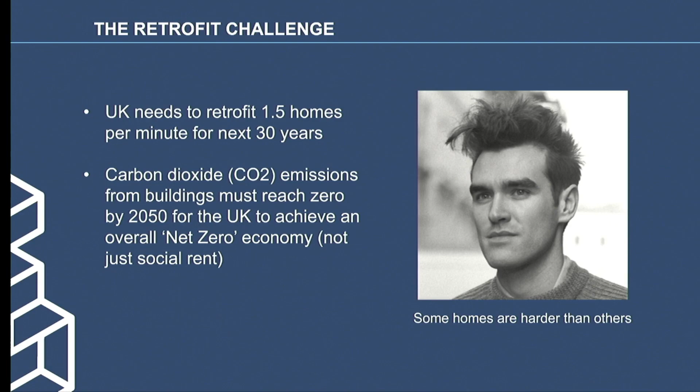So the retrofit challenge - some estimates put it that we need to be retrofitting 1.5 homes per minute for the next 30 years, so I shouldn't really be here. But that's a massive challenge, and clearly when we upscale and start rolling out retrofit at scale with the industry capacity, that becomes much more achievable.

Carbon dioxide emissions under the government's net zero strategy must reach net zero by 2050, and that doesn't just involve social rent, which is largely what we work in - it includes all properties, owner-occupied as well.

So, how deep is your retrofit? And this isn't a cue for a drinks or nibbles break - Hartley's or Bonne Maman? What I mean by that is, what we've seen in government-funded schemes is, firstly, a focus on deeper whole house retrofit, tackling the whole property, often at high expense with technical and practical challenges, and more recently, direction towards lighter touch, shallower retrofit, where you're able to retrofit more properties.

In the first wave of SHDF funding, there was a target to reach 50 kilowatt hours per metre squared per year in terms of space heating demand, and that's changed going into wave 1 and wave 2, to 90 kilowatts. So there's this idea of spreading the jam thinner, potentially looking at medium and longer term plans in order to get better outcomes.

I've referenced this very useful document from the Local Government Association, worth digging out, called Hard to Decarbonise Social Homes, and I've unapologetically pinched a few quotes from there to share with you, which give a good overview of what hard to treat is and what we're dealing with in this country with our very old and very varied housing stock. There's a lot of particularities within that stock.

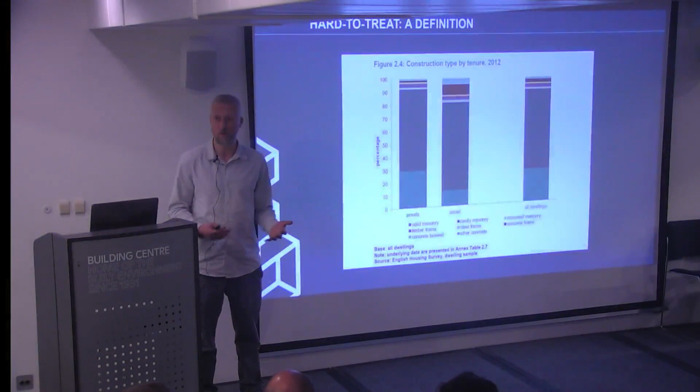This graph from that same report indicates that in the sector we're working in, social housing, there's a large quantity of system build properties. We're dealing with a lot of properties that were built post-war, put up very speedily, with a variety of trades working often to tight time deadlines and a minimal wage packet, and all the problems that can then entail. These properties were really only built to stand for about 20 years. They're still standing now, and we're looking at retrofitting them - how do we manage that?

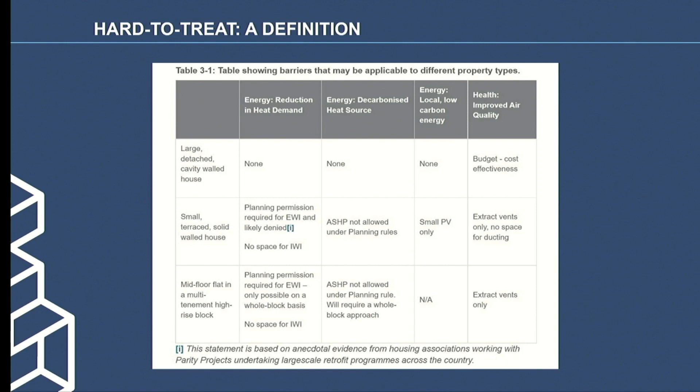From a high-level perspective, even properties you may consider fairly typical in this country - your solid wall Victorian property - show various levels of hard-to-treatness, if you will. A large, detached, cavity-walled house may represent fairly few challenges in terms of retrofitting. But when you get to a solid wall terraced house, a Victorian or Edwardian type, immediately you start facing challenges such as planning permission for applying external wall insulation, restricted garden space for installing air source heat pumps, potential noise and neighbour issues, and limited roof space for installation of PVs.

Not only that, there are also the technical challenges of insulating a solid wall property. A mid-floor flat presents some similar challenges in terms of planning and installation of new decarbonised heating. Just to run through some of the other technical characteristics that we've found present challenges in the retrofit journey.

Certain cavity walls are deemed hard to treat. These are cavity walls which are less than 50 millimetres in the cavity, and technically speaking, you're not advised to insulate those because of moisture control and bridging issues. So a cavity wall house may not necessarily be able to be treated with cavity wall insulation.

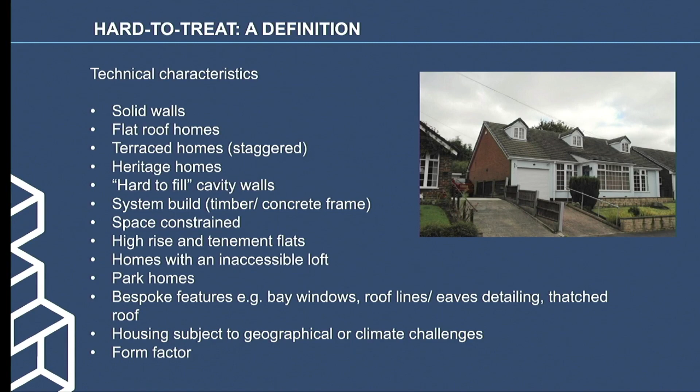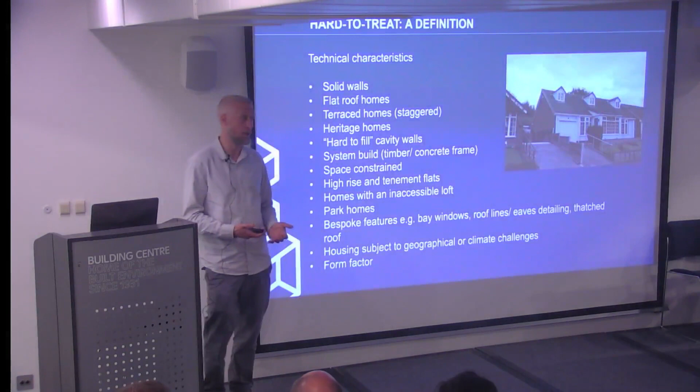Also bungalows, as can be seen in the image, present a challenge in terms of reaching reduced space heating demand because of the form factor. You have more surface area for the volume, which means that reaching something like even 90 kilowatt hours per metre squared per year space heating demand can be really challenging.

A couple more quotes, which I promise are the last wordy quotes in the presentation, from that same report, which is actually referencing the English Housing Survey, dated 2012, but I think still very much relevant.

Cavity wall insulation, and this emphasises what I was just saying. Of the 5.3 million dwellings that could potentially benefit from the installation of cavity wall insulation, 77% were assessed to fall into the standard fillable category, whilst the remaining 23%, that's 1.2 million homes, were classified as hard to treat. So immediately with those properties, you need to be looking at other solutions. Cavity wall insulation is not going to work.

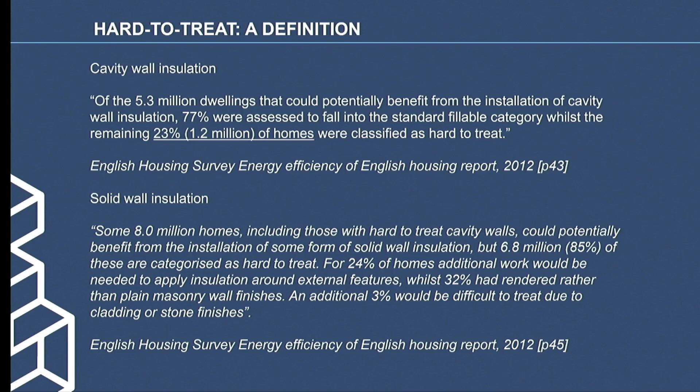In terms of solid wall insulation, some 8 million homes, including those with hard to treat cavity walls, which are therefore categorised as solid wall properties under the government funding as well, could potentially benefit from the installation of some form of solid wall insulation. But 6.8 million, 85% of these, are categorised as hard to treat.

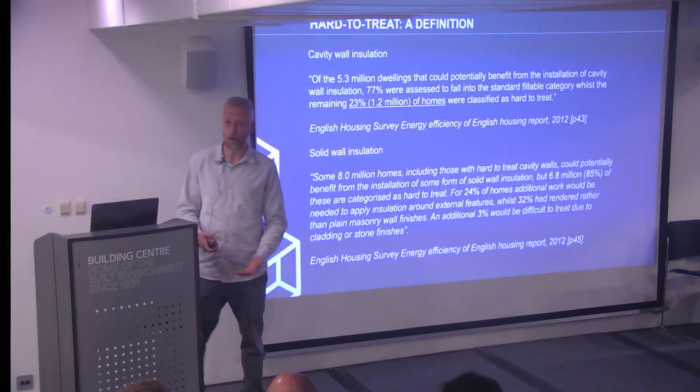And there's some further figures about additional architectural features and characteristics of solid wall buildings, just to show that the challenge we're up against is not a simple case of running around and slapping insulation on. There are many other challenges.

In terms of external industry constraints, I've mentioned planning already. We're working with a number of local authorities in the London and Birmingham areas. Some planning authorities are much more receptive to retrofit, others potentially have different views. So working with those third-party stakeholders is essential.

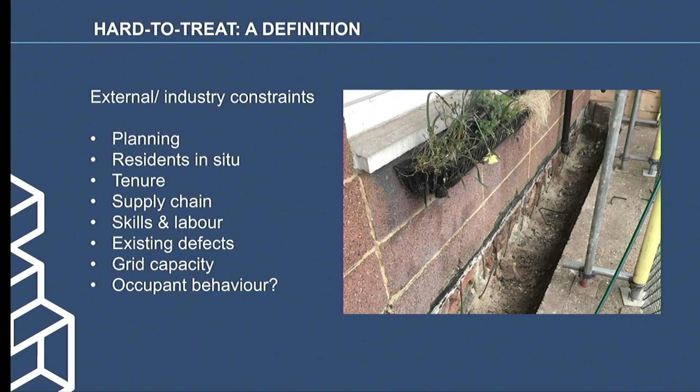Residents in situ is a massive thing. If residents are not going to let you into their homes, and let's face it, the retrofit will involve a certain level of disruption even if the majority of works are undertaken externally, then we're not going to get the retrofit done. The issue of tenure is an elephant in the room, I think.

Clearly, we work with social housing, but we still come across challenges from leaseholders in blocks, adjoining freeholders in the neighbouring property. Where do they stand in terms of what they may have to contribute financially, as well as the other technical and industry considerations around party wall and the like.

Supply chain and skills and labour, much spoken about in terms of the actual capacity we have as an industry to roll out retrofit.

And existing defects. A project I was on site earlier today, in fact, an issue that's only arisen since works have started in an estate down in Sutton in South London, a 1930s era estate. A lot of pre-work surveys were undertaken, but only now have we discovered some discarded asbestos, potentially some soffit, which was chucked down into the cavity during a previous roof replacement. So we're having to deal with that now, and if the landlord doesn't have really good records on file, that obviously presents an immediate programme, time and cost challenge.

The image is of some foundations we exposed on a system build property which needed reinforcing, and another property we were retrofitting had to be put on hold because of some serious damp issues in the walls, related to below ground drainage. So all of these types of things will no doubt crop up in owner-occupied retrofit as well.

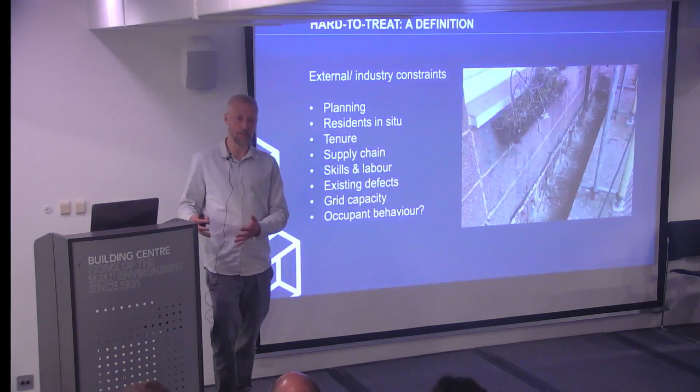And then briefly, grid capacity in terms of installing more air source heat pumps and PV panels. How is the national grid set up to deal with that? The flow of power and occupant behaviour - I think there's a big piece on the demand side as well. Clearly we can address supply side issues, but a big part is going to be from how we use our buildings, and maybe we need to use older buildings in a certain, more sensitive, considerate way.

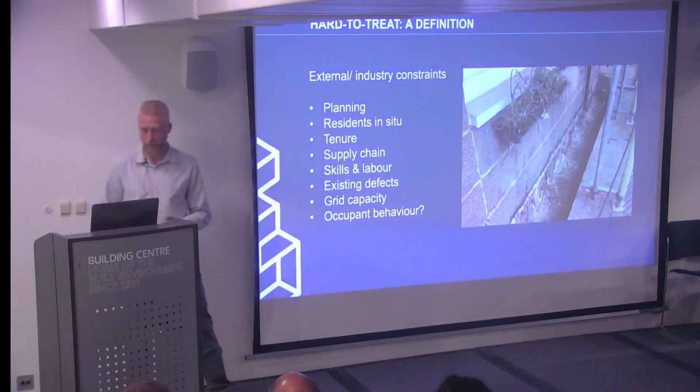Very quickly on policy, I've mentioned the SHDF stuff. There's various other schemes, like the boiler upgrade scheme for heat pumps, and home upgrade grant, which is for off-gas properties with low EPCs. So a lot of these schemes are targeted at low-income, vulnerable households. The Eco4 is the development of Eco3, the energy company obligation, where energy companies contribute to retrofit works, and a welcome development in the form of Eco Plus more recently, which is widening that pool of potential beneficiaries to people who aren't necessarily on low income.

So looking ahead, I think the funding and regulation is heading in the right direction. We've recently seen some updates to the building regulations, which are welcomed. Technological innovation is no doubt going to continue apace.

I very much think that going forward, there'll be more of an emphasis on green mortgages and green EPCs, that really forming the bedrock of value in a building. So the energy efficiency of your building will mean value, which hasn't been the case in the past. And is there potentially a role for stamp duty relaxation and retrofit credits?

So in terms of data, linking to what Julia will talk about later, from our perspective it's really critical that landlords undertake an initial study of their existing data, and a desktop approach is recommended. Looking at those wider strategies as well in terms of your planned maintenance, your fire safety upgrades, and building safety upgrades with the new Golden Thread and Building Safety Act, trying to bring that together into a coherent whole.

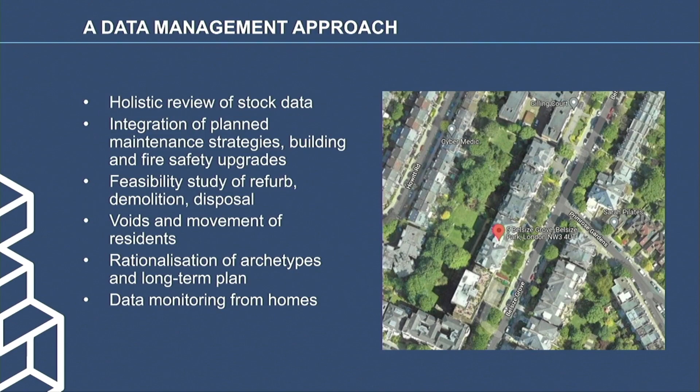And looking early on at the feasibility of retrofit. Certain properties, particularly certain system build types, can be uneconomical to retrofit. And whilst we always recommend retrofitting and refurbishing first as the best option in terms of carbon output, in certain cases, economically or even technically, it may be better to redevelop.

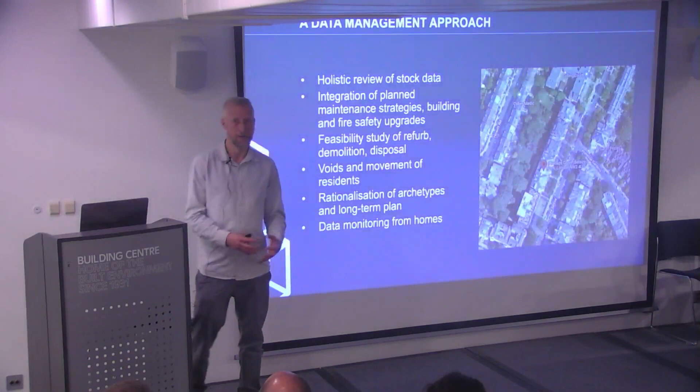Looking at voids and movement of residents in terms of the opportunity for developing a property once there's no one in situ, and making sure your archetypes—in the sense of categorizing your properties as best as you can to achieve efficiencies—is undertaken as part of that desktop study.

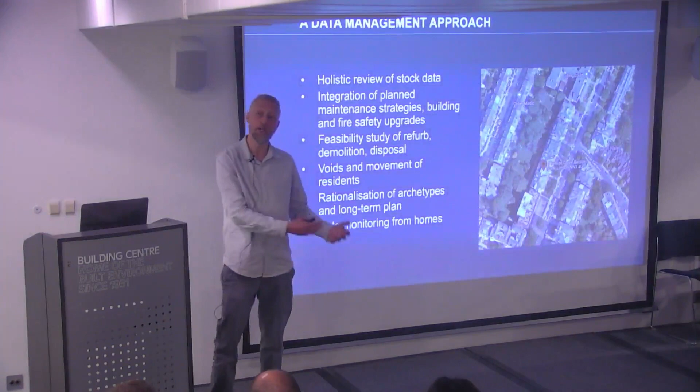And we're seeing now, obviously, a lot of data coming out of properties in terms of pre-works and post-works to inform us in terms of the best measures to take. So the technology is developing in terms of getting better outputs for residents: thermal comfort, relative humidity, temperature, and the like.

Just a bit more about archetyping. We're trying to work internally on a kind of nomenclature of identifying particular housing types. There's a lot of them, but looking at that sweet spot between identifying groups of buildings early on, diving more into the detail as the design progresses, and trying to find efficiencies that way.

There are a lot of homes, as I say, where it may be hard to justify the economical impact of the retrofit, but reducing heat demand will always reduce bills, emissions, and required space for equipment—another challenge—putting in the internal piece of kit for the ventilation or the heat pump, where residents are potentially going to lose space.

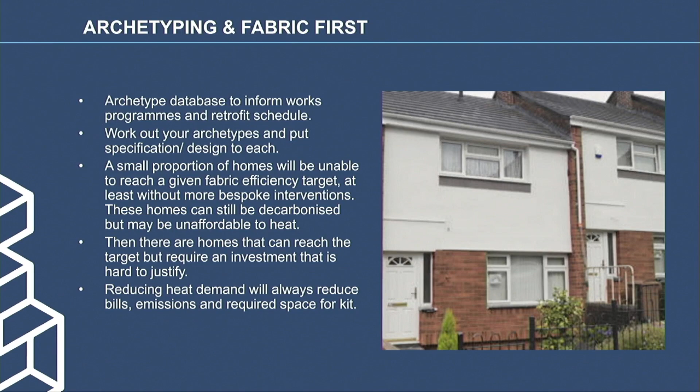And is there potentially a discussion to be had about rent, the level of rent for properties which are going to be potentially stranded assets, in that they may not be able to be decarbonised? Do we have that discussion in terms of what we do with those, rather than them just being passed on and being left?

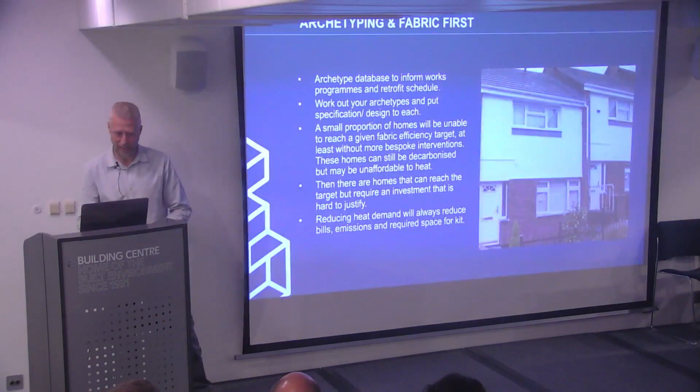So PAS 2035 is sort of the underpinning of this presentation, really, and what's driving our work. We have to comply with that standard. It's a whole house deep retrofit standard, off the back of the Each Home Counts review, very much looking at the importance of ventilation when you're applying insulation, given the failures of previous schemes where a lot of damp and mould issues were experienced.

And that idea of the medium-term plan—looking at measures you may be able to do in the sort of 5-10 year term, not immediately—to balance the cost spread, and also to work with the other constraints. And is there a certain amount of insulation that is enough?

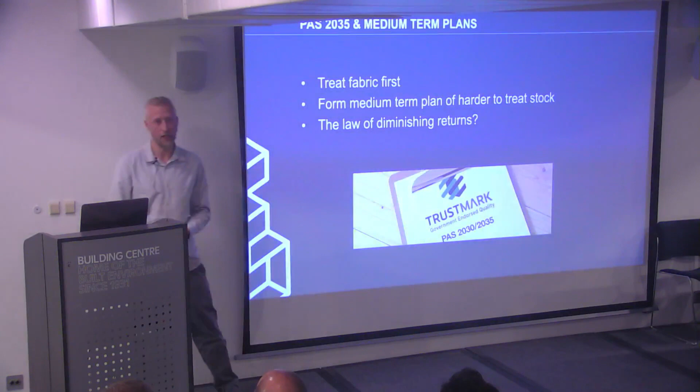If 90mm of insulation gets you to a 70 kilowatt metre squared per year space heating demand, do you add an additional 20 mil just to save another 5 kilowatts? Where is that sweet spot in terms of the best thing for that individual property?

So a couple of case studies just to finish. We're working with a client, Central London Local Authority, London Borough of Camden, who are very forward-thinking in their retrofit journey. They were one of the first councils to declare a climate emergency.

Top storey were all leaseholders. We were looking at options of installing internal wall insulation. They said no thanks, not to my lovely new kitchen and bathroom. So immediately this block presented real challenges.

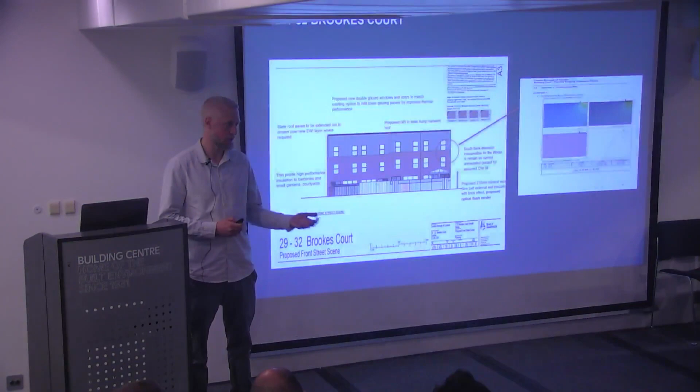And this project was one of the client's first projects to demonstrate a whole house approach, and to help tenants reduce energy bills, carbon emissions, and improve thermal comfort.

So for this property, we undertook an initial appraisal and engaged a conservation area specialist to advise on potential measures. This being a solid brick building, a mid-19th century villa, it's got two wings around a central stair core and was latterly developed into bedsits.

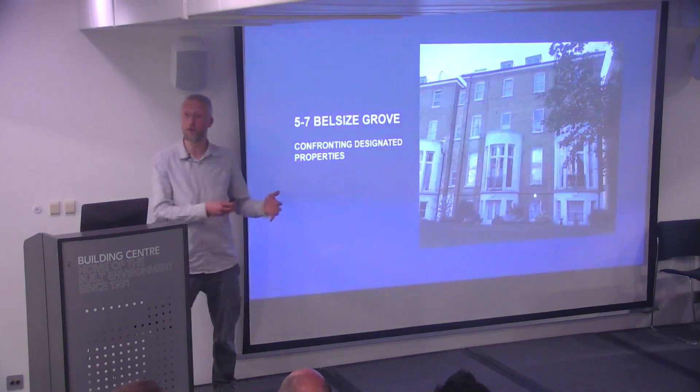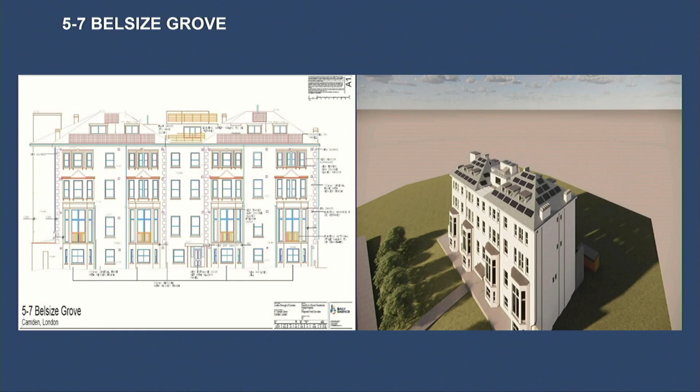The conservation area report for this building actually really condemned the front elevation, which I think is tidied up a little bit in our model on the right-hand side. It had previously been rendered, and not done in a very sympathetic way. So we were able to take that and show the planning authorities that we can actually improve the appearance of this property, as well as improving the energy efficiency via the installation of PV panels, new windows and doors, and breathable solid wall insulation.

So just to wrap up, a decarbonised home, I think, is electrically heated. We're heading towards heat pumps - that's the way, with gas boilers being phased out in new builds in the not too distant future. Defining 'enough insulation' is not absolute, it requires a value judgment. So I think this is where professionals like ourselves come in - chartered building surveyors, architects - to advise on that sweet spot, what is the right level of retrofit.

Some homes may fail to reach a given fabric efficiency target, and require a wider industry and policy discussion. So what I mean by that is the planning discussion, and also what we do with some of these properties which may be stranded assets, such as system build properties.

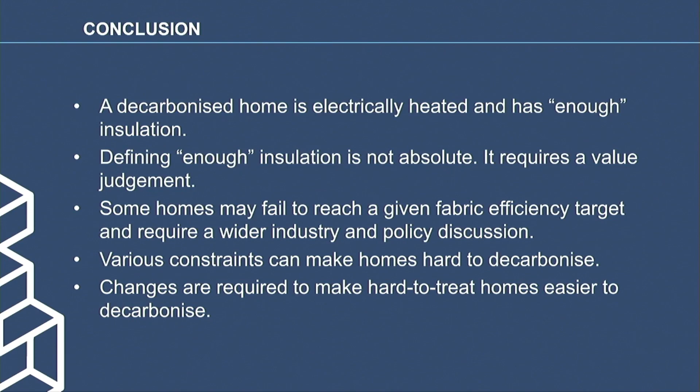Various constraints can make homes hard to decarbonise, such as was evidenced in the first case study, and changes are required to make hard-to-treat homes easier to decarbonise. So, as I said earlier, not just the planning side, but potential government policy, mortgages, and maybe a discussion about rental levels as well. So I hope that was interesting, and I'll pass on now to the next presenter.

Hello, good evening, and what a week.

So what I'd like to talk to you about today - give you a little bit of introduction about the company, what we do, what our product range is. We work with Baily Garner quite a bit. We've got quite a wide range of products, but I've also got a case study I find particularly interesting.

I've spent about 30 years in fenestration, glazing, curtain walling, windows and doors, and most of that in the social housing sector. So I'm a bit passionate about trying to improve properties for the people that have to use them.

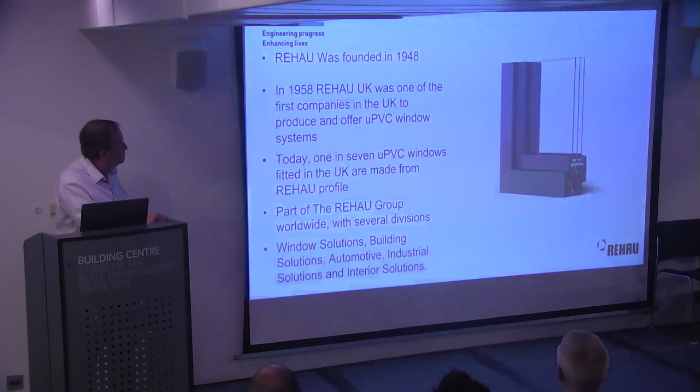So REHAU, we were founded in 1948, as there. In 1958, it was one of the first companies to produce PVC window systems. We opened our first office in Slough in Buckinghamshire, and 1 in 7 windows sold today is a PVC window by REHAU.

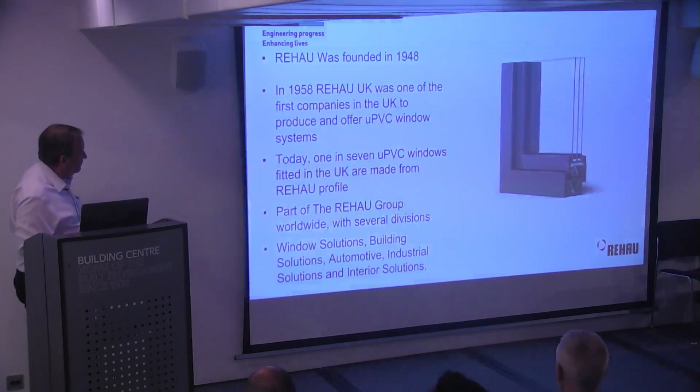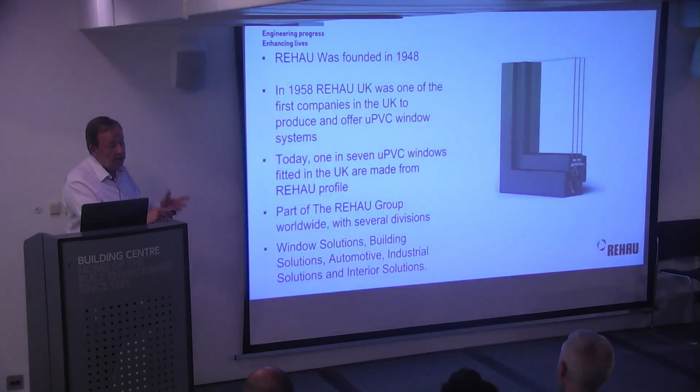As you can see, the group's got a much wider range of products than just windows. We've got windows, building solutions, automotive, industrial solutions, and interior. For example, REHAU has factories alongside BMW, Audi, and Mercedes, and we produce the bumpers, mouldings, air conditioning ducts, etc. for them. And if you've flown on an Airbus 320, you've probably eaten off one of our tables. So it's quite a wide range of products.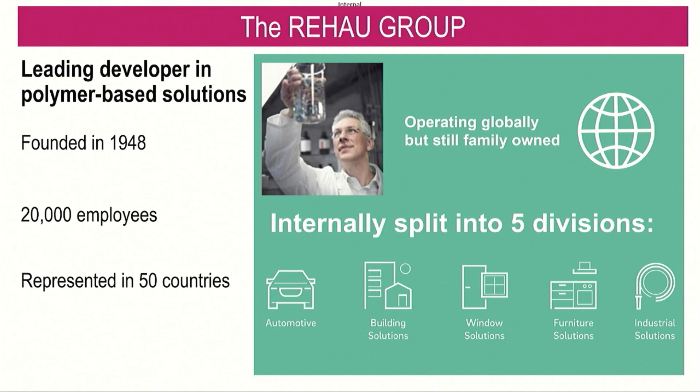As it says there, we're polymer solutions that are long-term solutions. Founded in 1948, about 20,000 employees across the group, represented in about 50 countries globally. My brother used to work for our office doing exactly what I do here for the South African office in Joburg. So there's the 5 divisions we talked about: automotive, building solutions, window solutions, furniture, and industrial solutions. I'm responsible for my region from the Midlands down to the South Coast.

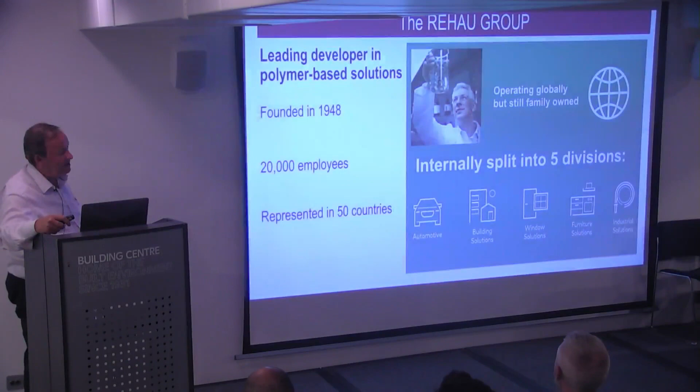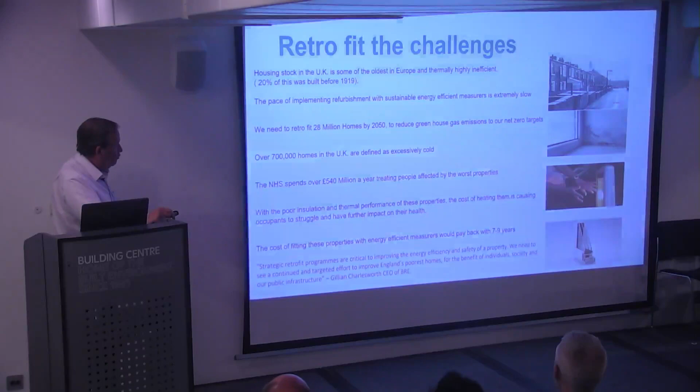Some of the retrofit challenges - you can see here that housing stock in the UK is some of the oldest in Europe, and 20% of this was built before 1919. But the pace of how we carry out retrofit and improve this housing stock has to be increased tremendously for us to make an impact.

I believe there's over 1,600 housing associations UK-wide, and over 300 councils just in England alone. So really these are the areas I believe will make the biggest impact if funding is available.

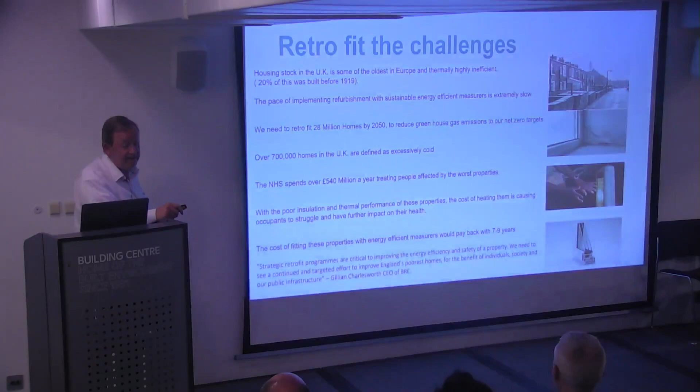The NHS spend about £500 million a year trying to treat people affected by worse conditions. We've seen some publicity lately on how things can get to a pretty poor state for some social housing. With poor insulation and poor ventilation, people are struggling to keep their properties in good condition, but also struggling to keep comfortable.

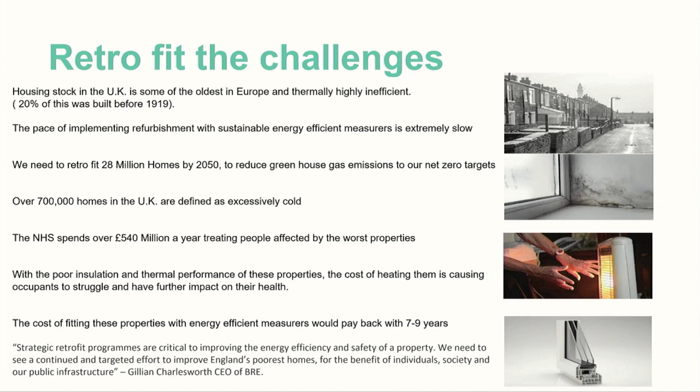So if we look at Kelson House - this is not a glamorous high-end passive house solution, not a high-end residential housing estate. It's basically a large block of flats originally produced in 1967, sits on the Isle of Dogs. This was a particular challenge for a number of reasons, but we wanted the comfort, the ventilation, basically reduce the cost people were paying out on living in those conditions, and we had an opportunity to do that. But there were a number of challenges for us.

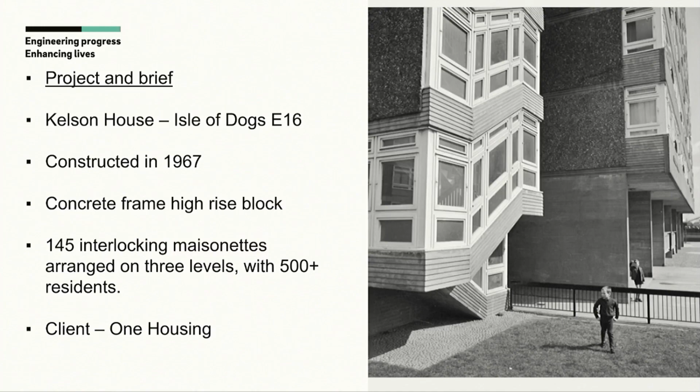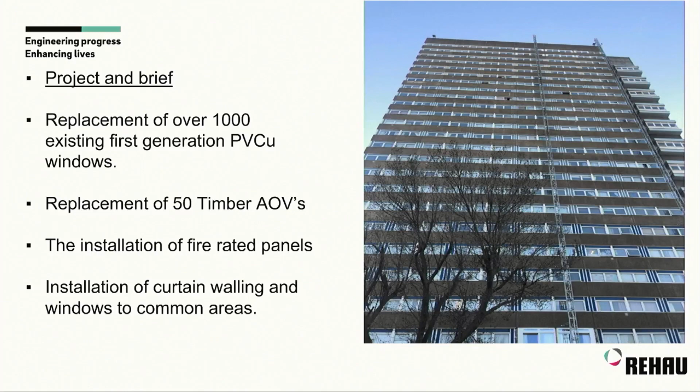As you can see there, it's quite a large block, 25 stories. There were over 1,000 windows that needed replacing. The existing windows were first generation PVC, and I think they gave a U value of just over 2.4, so pretty poor by today's standard - I know on the passive house certified projects we're working on it's as low as 0.8. So 2.4 wasn't particularly good, but we could improve that tremendously.

We also had 50 AOVs, automatic opening vents for smoke and heat extraction, and the standards you have to achieve now for an AOV are considerably higher than they were years ago. This gives us an opportunity to make the building and the block safer for those reasons. We also put in fire-rated panels to bring it up to current regulations, and there were some curtain wallings to the common areas.

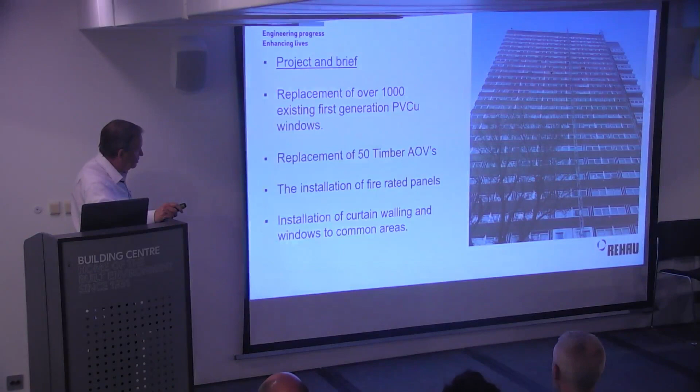So what were the challenges? The height of the building was 72 metres. I know from experience working with the installer company that carried out the work that they probably had 4 or 5 teams go up on the access equipment to about the 5th floor and say, 'it's not for me.' So having to go up another 20 floors was a bit of a challenge.

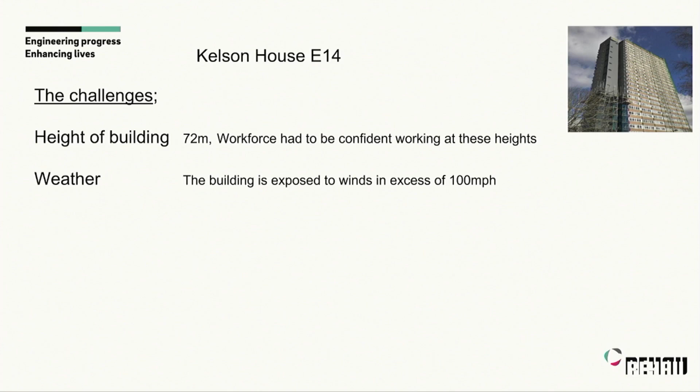We also had the weather to contend with - the block was exposed to in excess of 100 miles an hour wind, and we had to consider that for the operatives. If you look at it, it's not a block that's got a shroud of scaffolding and tarpaulin around it to keep the occupants or workers dry and clean. It was basically exposed to the elements. We were fortunate the weather was quite good at the time.

So for the access equipment, the reason we chose this type - mast climbers, if you're not familiar with them - is that it gives us a facility to take operatives up to the various levels and down with materials taken out with reasonable ease, without having to cloak the whole block in scaffolding. And frankly, for residents to sit behind tarpaulin for 6 months in summer when they're normally looking out over the River Thames wasn't particularly good.

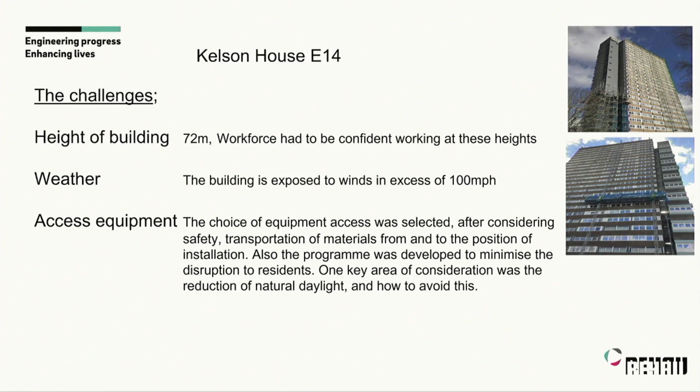Using the mast climber, although it had some really good access solutions, there were problems for the workforce to make sure they complied with the really strict RAMs we put in place, the risk assessments and method statements. They had to wear a tool belt, with most tools tied off. There was normally one person on the inside of the apartment working with two people on the outside. All of the glazing, because it was internally glazed, could be removed, and they used pressure suckers to take the glass out internally but pass it back outside because we didn't want to fill up the block of residence lifts with glazing. So there were a lot of challenges there.

We were concerned that if we worked with the residents, kept them informed about what we were doing in terms of access, and gave them access to the daylight they were used to, it would make the situation much, much better.

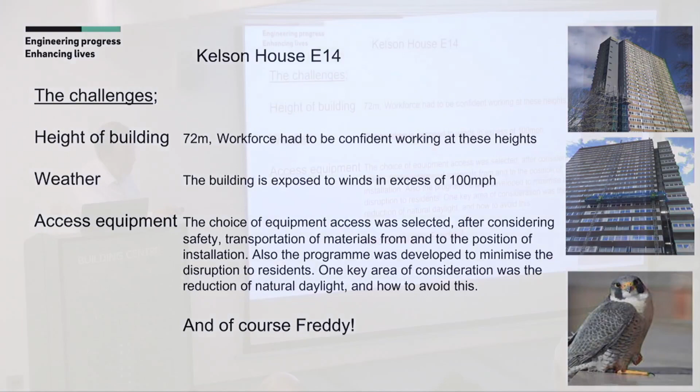Then we had a hidden challenge. Freddy the Peregrine Falcon. We were told very late in the project that unfortunately we'd have to start on the 18th floor, not the 25th floor, because there were peregrine falcons nesting on the roof, and we had to give them time to fledge the nest, which we did. By the time we got down to about the 10th floor, we could get back up to the 25th floor, because it's not a good idea to work back up the block. It's much better to start at the top and come down.

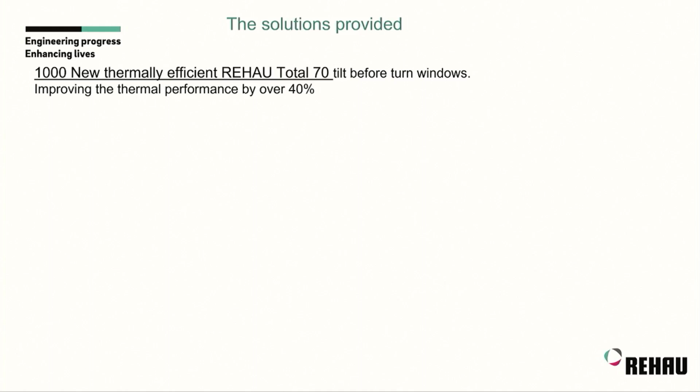So what solutions did we provide? We put in 1,000 new REHAU windows. These were tilt-before-turn windows, and we improved the thermal performance of the new windows by over 40%. Previously, the windows installed were top swing reversible windows. Now, I don't know if you're familiar with those, but they are quite a safe window when in the fully reversed position - you can clean it quite comfortably and safely - but they are difficult to operate. So we put in tilt-before-turn windows.

By changing the design of the window, we could allow residents to get very good purge ventilation with the window in the tilt-in position, still locked off on the handle, so there was no way they could put it into a fully open position unless they wanted to. In addition, we put in an independent restrictor, so the occupant had to undo the handle with a lock, undo the restrictor, and then put the window into the open position. We were very conscious about safety there.

Purge ventilation was important because at that height, there's a lot of wind blown through. If you've got a top swing reversible window, it's opening outward and the wind continues blowing against it, trying to shut it. With a tilt-in window, they were getting much better ventilation.

It's also important on projects that we get the handover right. Frankly, sometimes when we install a product, if we don't let the residents know the windows have this facility that can be put in the night vent position - giving ventilation for the full height of the window, with handles locked off and the restrictor and night vent position used - they're going to miss all those elements. I went to many sites over the years and found people had very poor handovers, so much so that the trickle background vents were still in the closed position from the day the installers put them on the window.

We also put in 50 new AOVs to the block. You might find that a bit strange - they were PVCU AOVs, but to comply with current regulations, the window has to go into a furnace at 300 degrees centigrade. We tested the window some years ago and we've got a certified AOV. So it's important to understand what these solutions are, because the original AOV windows were timber.

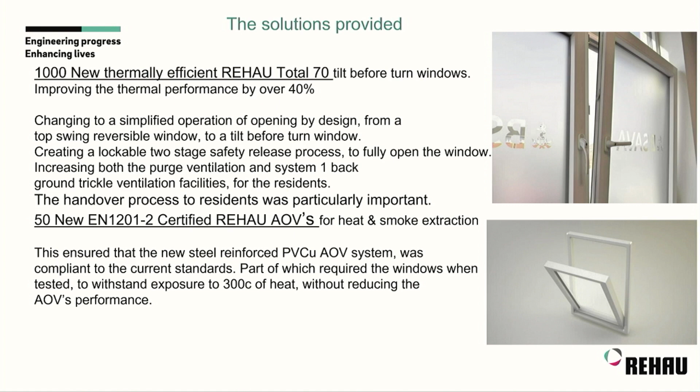The other thing that the business is passionate about, and I think we've got the opportunity to look at this when we can, is that we were taking out 1,000 windows. 5 or 6 years ago, 1,000 windows coming out of a building would actually go into landfill. We had to look at how we could make sure we didn't go down that road.

The business is passionate about recycling and sustainability. So about 4 years ago, we bought a company and invested 28 million in a recycling plant that allows us to take those windows from the sites installed across the UK and take that profile back to the recycling plant.

And recycle it. So coming out of this project alone, as you can see, we had 38 tonnes of PVC, 20 tonnes of steel, 12,000 linear metres of rubber, 4 tonnes of metal window hardware, hinges and locks, and 28 tonnes of glass.

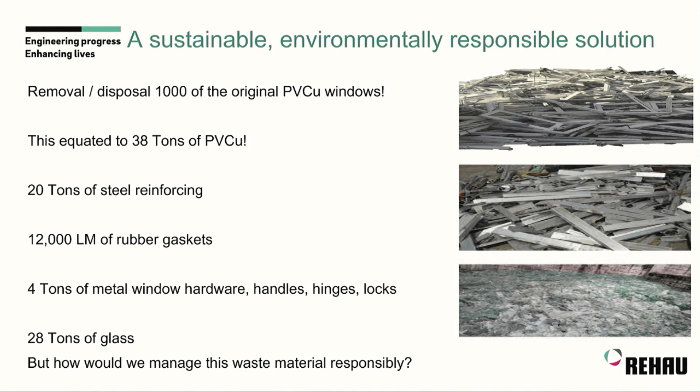So how would we manage that? Where would that go? It's important not to just dispose of that in a non-responsible way. So let's look at a small video here that shows exactly what we do in our recycling plant so that we can utilise that material again.

We recycle the material and then that comes out as a core section of the window, which gives us about 70% recycled profile on a new system.

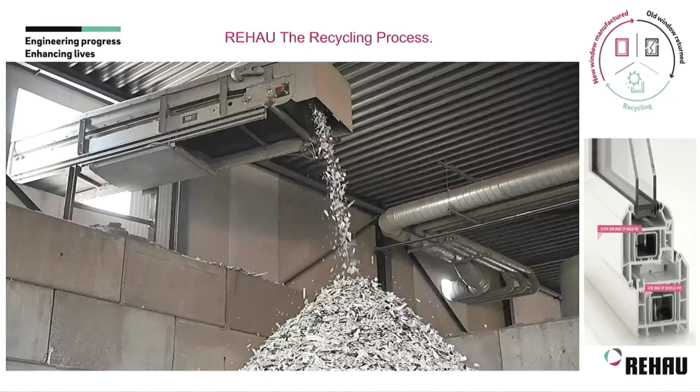Welcome to PVCR. We're based here on Hardwick Road in Runcorn. I'm going to show you the whole process today, from the receiving of the feedstock all the way through to dispatch of a finished white regrind chip.

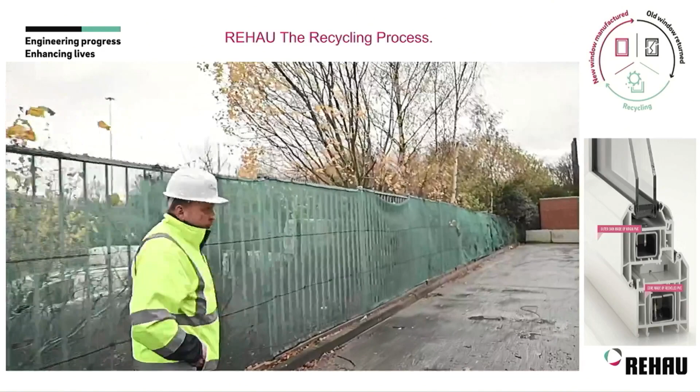Now it's important to mention at this stage that at PVCR, all of our frames are offloaded internally, inside the building. That's very different to a lot of recycling operations. So this is our frames bay, and that's typically the sort of stock that we receive on a daily basis.

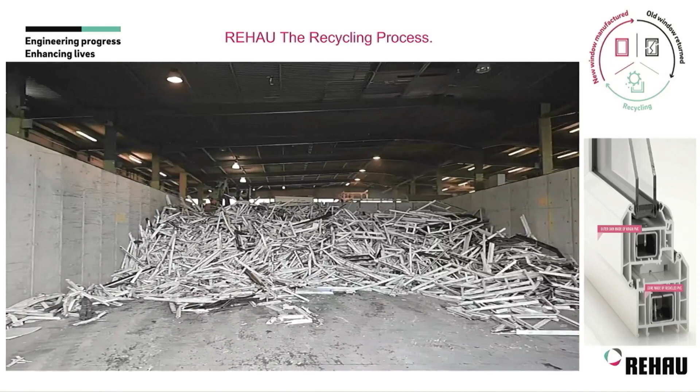We receive anywhere between 3 to 12 trucks a day, depending on the size, and they can be anywhere between 1 tonne and 25 tonnes. Our vehicles will normally offload in this area, and that could be walk-in floors, tip trucks, or smaller 1-ton carriage trucks.

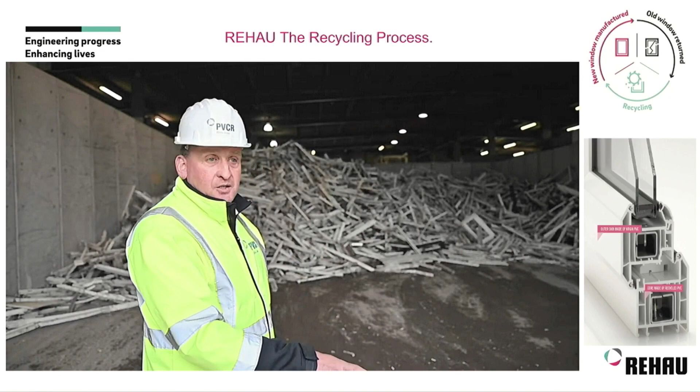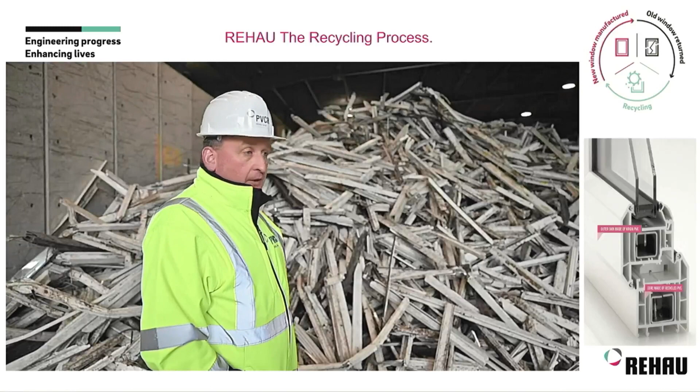And this is typically what our incoming frames look like. We try to get them as clean as possible, but of course they're post-consumer, coming from various locations, from building sites to reclamation council areas.

So this is our shredding operation. We take the frames, which can be anywhere between 1 metre and 8 metres long, and put them through a process that reduces them to a 60mm shred.

At the same time, we'll try and take out as much of the metal as possible. Now, frames in the UK are as much as 20% steel, so we try to take as much of that steel out as we can at this operation.

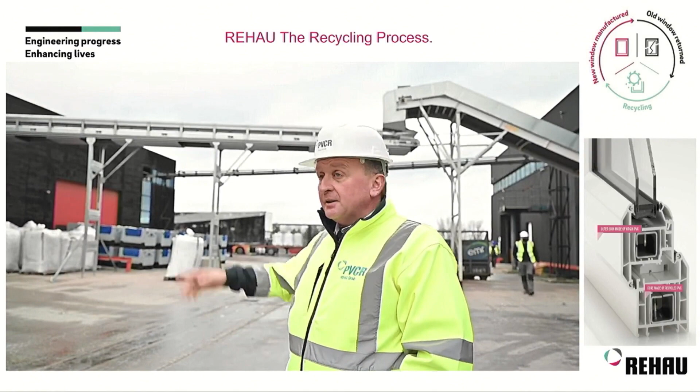So we operate over 2 buildings, and we'll send the shred from building 1 to building 2 via the overhead conveyor that you can see behind me.

So as well as the window frames, or what we call post-consumer, we also process post-industrial waste as well. So these are offcuts from one of our warehouse customers, and of course this is something else that we'll process here at PVCR.

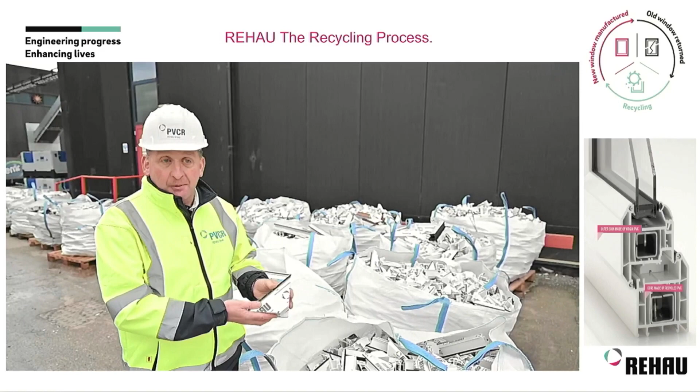Okay, so this is building 2, and here we'll take the 60mm shred and separate it into 2 streams, removing as much metal again as we can before we then pass it into the wash plant. The wash plant removes all of the floating material, and the denser material, or PVC, will then process the next part of the operation, which is granulation.

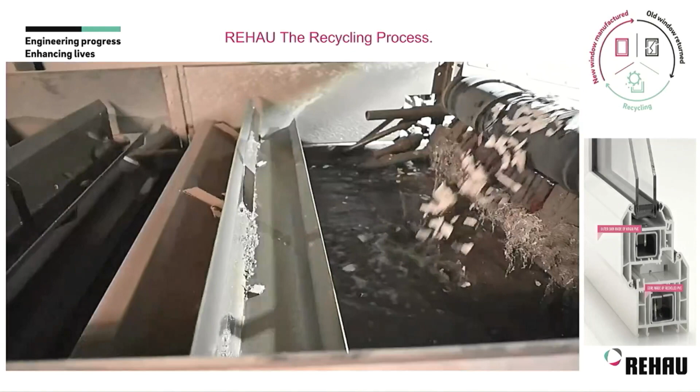We will then reduce the 60mm chip into a 14mm chip, and then we dry the product. After drying, we will then do a final colour sort after removing any less dense material.

The final check is a colour sort at the end of line, and then off to our customers. REHAU's specification for white material is very high, so we remove a lot of non-white material at this stage.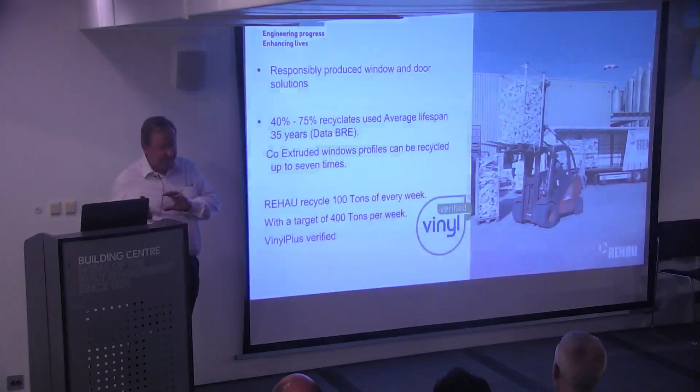That gives you the whole recycling process, and as he says in the video, that material comes from various post-consumer sites. So there's windows coming out every day. We've got a network of about 1,000 installation companies, and about 150 manufacturers of our products.

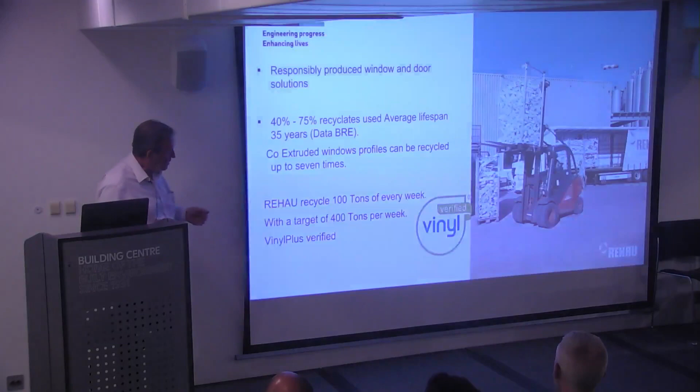On this screen you can see what we call the post-industrial waste. Part of the manufacturing process of window systems leaves small offcuts of about 50mm to 75mm. That's all virgin material, but it's just material left at the end of the optimisation of the profile in the factory. That gets batched up and put through the recycling process.

We end up with the central core of the product being recycled. It could be post-consumer waste, as you saw earlier, or post-industrial. But it does mean we can have profiles that will have up to 75% recycled material.

If we look at the BRE's figures for aluminium and PVC windows, we should have a life cycle of about 35 years, and we can do that. Our chemical technologists told us we can use that recycled material for 35 years, 7 times. So it's a long span of life cycle for the product - it's not a short-life plastic product.

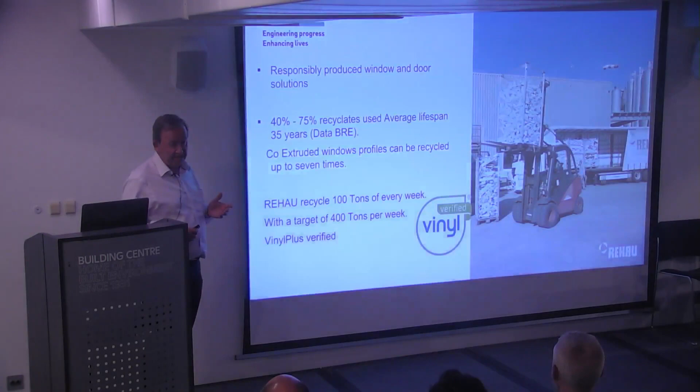It's a long-term investment, but it does mean we can offer clients the opportunity to have recycled material. We've had to put that through all the relevant British standards to make sure it complies with security, stability, weather performance, etc., and it's exceeded and passed all of its kite mark licenses.

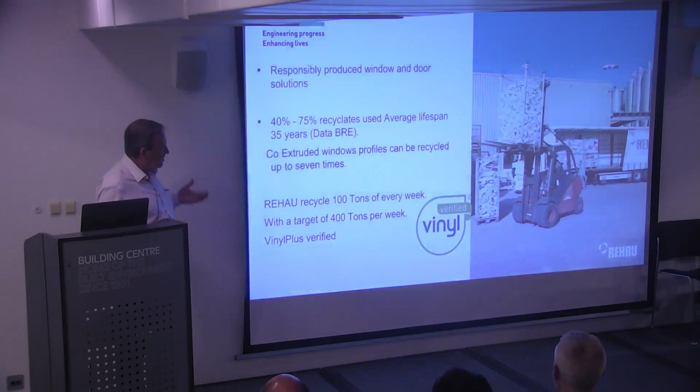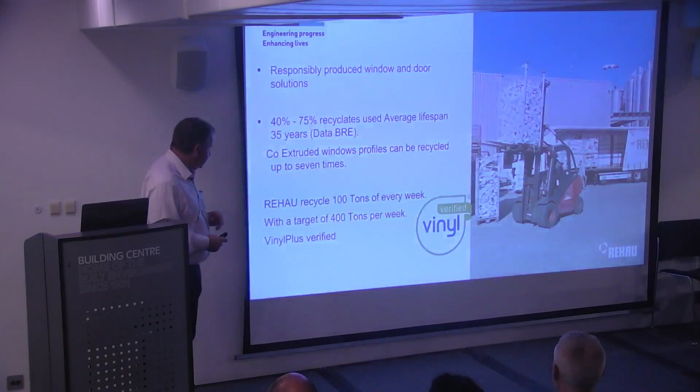So we recycle about 100 tonnes of material every week, and we believe that saves somewhere in the region of about 200 tonnes of carbon by doing that instead of manufacturing from a virgin material product. But we're looking to improve that to somewhere in the region of 400 tonnes per week on each of our sites.

Okay, so recycling the post-consumer and post-industrial waste utilises, as we said, up to 75%. You can see here on the screen the core section with steel reinforcing - that will be recycled material, and on the outside that will be the virgin material.

I mentioned earlier about 12,000 linear metres of rubber gasket coming out of these systems. We can recycle that, and in its raw form it can be made into, for example, gymkhana pony stable mats where they put on the wall to protect the young riders.

The glass, the 28,000 tonnes that we have, basically that's used in highways now - you're probably familiar with that process. So there are facilities that can take that raw material, not put it into landfill, but recycle and use it.

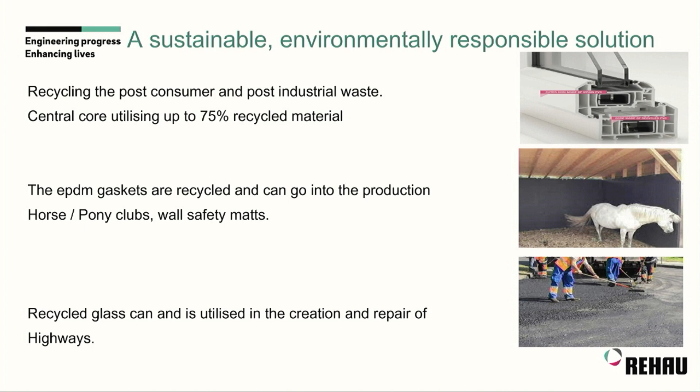So in summary, recycled window material can be post-industrial or post-consumer waste. All the materials we talked about earlier can be recycled, and we can use up to 75% of the profile. So if we're responsible about how we use PVCU, we can do it sustainably, and we will continue with that theme throughout the business.

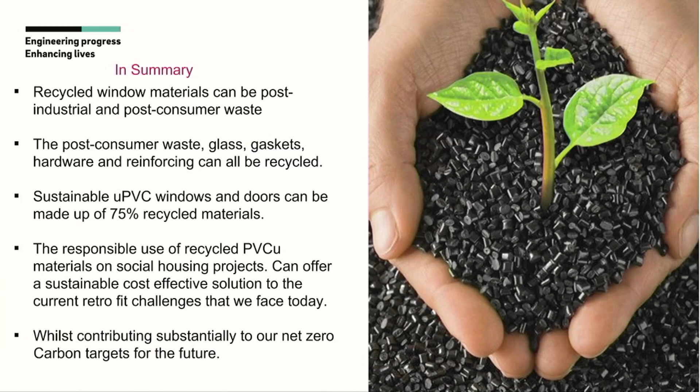The other thing I'd like to emphasise is the large project we did at Kelso House - we took the frames from that project, and since then we've probably done another 30 like that. So it's a continual commitment.

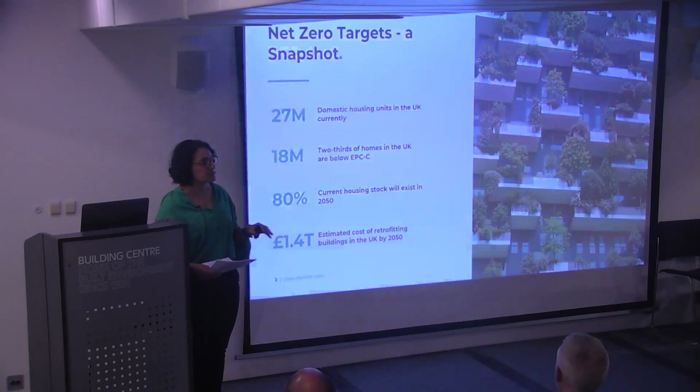When it comes to retrofitting social housing properties, the challenge is no less complex. I want to take a slightly different approach and walk you through a scenario to give you a sense of the challenges social housing providers might actually be going through on a daily basis, and why technology can actually play a part in facilitating the delivery of retrofitting properties at scale.

Okay, so if you will, I'd like you to imagine a scenario. Shut your eyes if you wish, but I want to walk you through a scenario with me. Let's say, for example, you're in charge of providing safe, warm and comfortable homes for, let's say, 30,000 people.

Those properties need to comply with various standards. They need to be safe. They need to comply with carbon emissions targets, and importantly in today's context, they need to be cost efficient to run and maintain.

Now, for argument's sake, there are 15,000 units that need taking care of. Each of those 15,000 units will at times require ad hoc repairs and maintenance work. At times they'll be void and need to be refit to make them ready for the next tenants. You'll need to conduct regular inspections, make sure the properties are compliant with gas safety standards, for instance. Each property will also have its own planned maintenance works on the books.

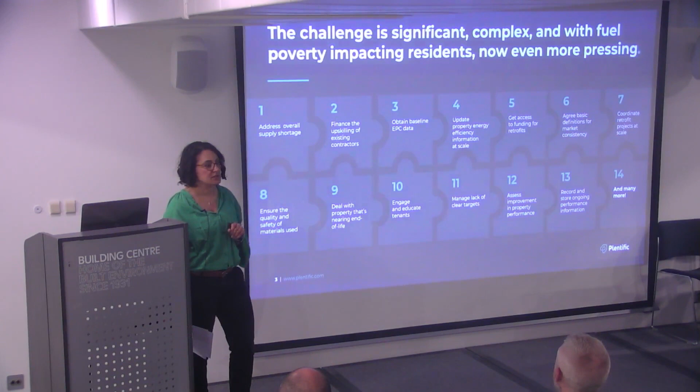But if you think back to the scenario I walked you through—what if your data on your properties could automatically be updated with every piece of planned maintenance work or responsive repairs work you did on your buildings? What if you could procure contractors dynamically through a dynamic purchasing system?

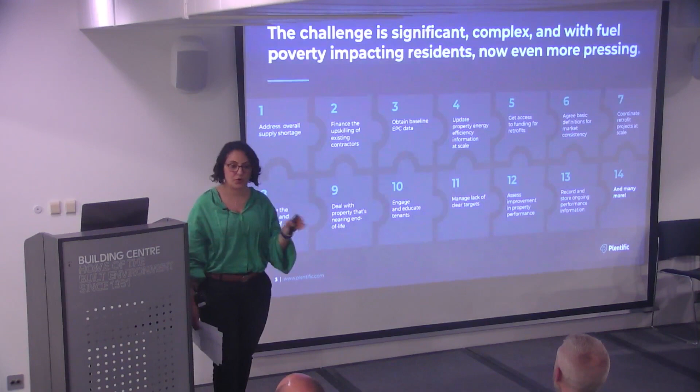What if every time you needed to do your monthly reports, all you had to do was open one system, visualize all of your program data in one place, press a button, and print it? Those milliseconds, hours, days could each save you time that would enable you to deliver more retrofits—5, 10, 1,000—that would help deliver retrofits at scale. Because like every other facet of our lives, technology makes things faster and, frankly, less frustrating.

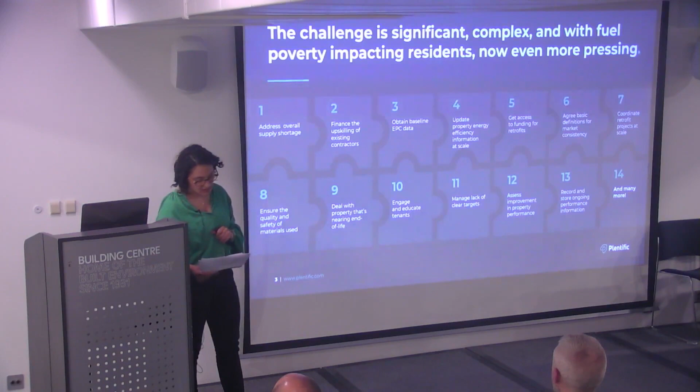So, 10 minutes into my presentation or thereabouts, why am I actually talking to you about this? Plentific is a platform that streamlines property operations. We offer connected end-to-end software that connects processes and people for intuitive, fast, data-driven decision-making.

Some of our clients are some of the biggest social housing providers in the country, and we're backed by some of the biggest names in real estate. Our existing software offers solutions for housing providers to manage their responsive repairs, voids, building safety, inspections, and workforce management. And we connect people, processes, property operations, property owners, property operators with their tenants and suppliers through one system to create exceptional experiences. But it can't stop there.

So now we're challenging ourselves to figure out what we can do and how we can use our technology to modify what we've currently got or build something completely new to expedite the delivery of retrofits at scale. By partnering with a bunch of social housing providers and experts in the industry, we've pulled together a centre of excellence, and we've just completed phase 1, mapping the challenges faced by social housing providers in delivering their retrofits, and part of that was what I presented a moment ago.

Now, in collaboration with those associations and organisations, we're going to begin designing something together. Because if you can combine enhanced connected technology that's been collaboratively developed, together with enhanced thinking around education, policy, funding, from places like the National Retrofit Hub, retrofitting at scale is definitely achievable. To the timeline, questionable, but definitely achievable. Thank you.